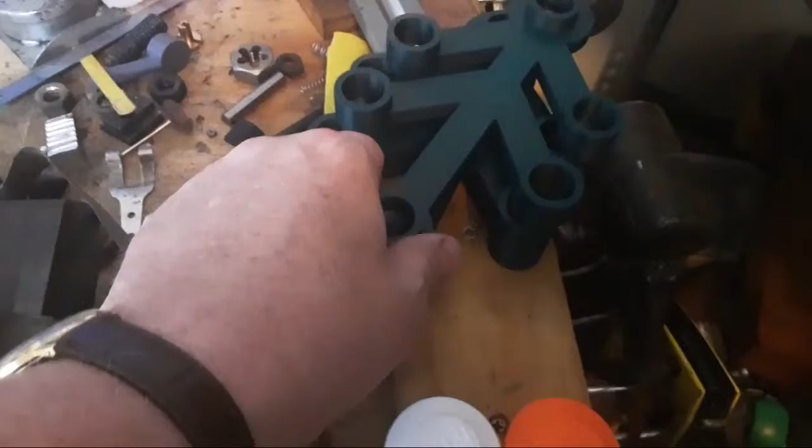And a stack of these. The giant Lego bits, just a Christmas wreath, is actually what it is. So over the weekend I printed 6 of them.

There is a new LBSC book out, David. Eddie's written it, he's done a good job of it, I believe. I haven't actually got one yet, I haven't seen one. I have every intention of ordering one in the next week, but it hasn't happened yet. Looks like a good video, a good book. I've got 2 books from the UK from friends who've written that I'd really, really like, but it hasn't happened. Neither of them have happened yet, so it will.

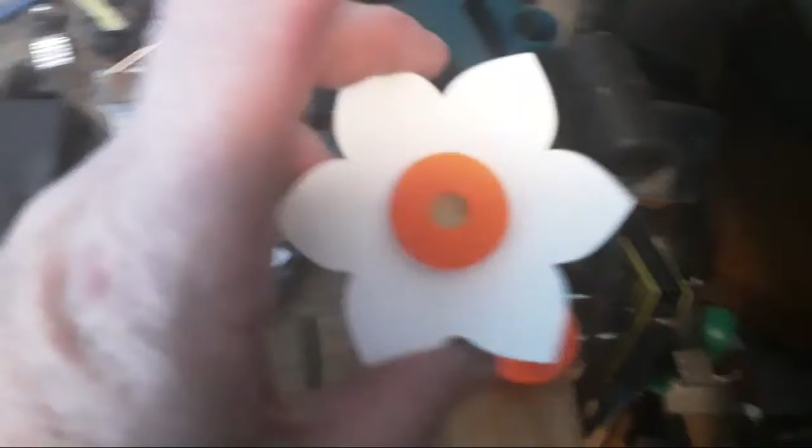So basically there's some Lego flowers, all clips together like that. Oh, good stuff David, give us an idea what it's like. Eddie's a pretty good friend, actually.

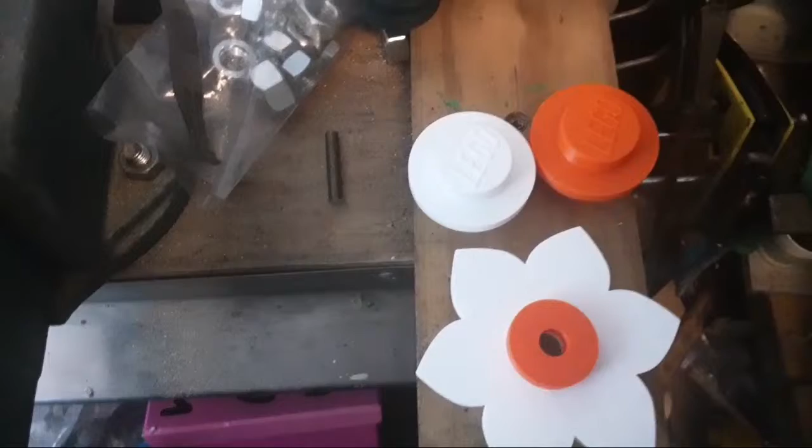I think one of my photos might actually even be in the book, but I'm not sure about that, haven't seen one yet. My picture of the blue plaque at Purley Grange, or Purley Road. I think that might be my picture, but I'm not sure. Don't know if he used it or not in the end. It was probably fairly muddy because it was sort of a second hand when he got it. When I got it, really. But anyway.

So that's a project, these took about 4 hours each. The Prusa firmware makes these pretty quick. Hey, Stuart.

These I'm printing with support. They probably hardly need it, they're well designed, they probably don't need it I think. But I'm printing them with support. So this is taking about an hour.

And 4 of these flowers, 3 of these flowers took about 4 hours. So there's a bit, someone was asking, but there's a bit of work in it. There's 6 of these, I think, and there'll be some more, I think 4 white flowers and 4 yellow flowers, something like that, with dots, and some yellow ones and white ones and orange ones. Anyway, present for someone, just messing around with that.

So the printer went most of the weekend.

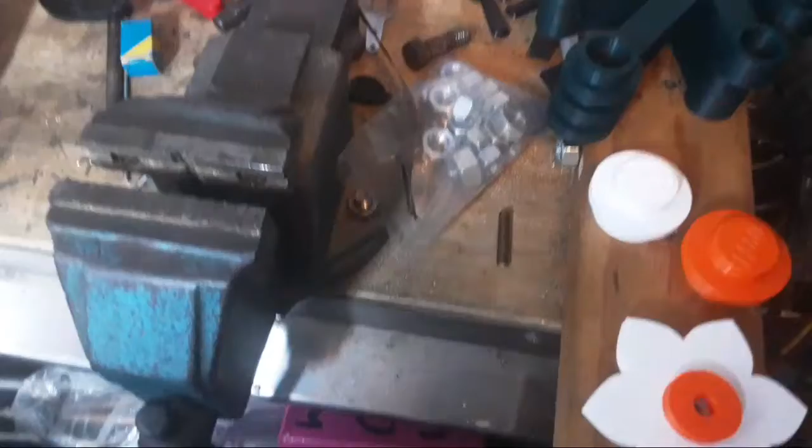Watched a little bit of YouTube, not a lot. I noticed there's a ClickSpring video out today, which means there's probably content back on Patreon. I'm not a Patreon supporter of ClickSpring because he kind of aggravates me a little bit. But I feel like I'm probably missing out, which is not good. But anyway, we'll follow along and see what happens, see if it's worth joining up again.

Rustanox, good day. There's a build video this week. It was quite a good build video, and I'm glad they've got the power back on and stuff down there. There was a Mark Shed Talk, a couple of Mark Shed Talk videos.

That's it. I stopped on the way home and bought some supplies. I was a couple of drills short in my Imperial set - still am when I look at it. I'm not sure how many of them actually got put back in the box. That's a bit of an issue, because I know I had a new drill there. Anyway, we've got some upgrades on that, and a couple of metric ones too that were missing. There's the 7/32 one that I couldn't find. Might put that away.

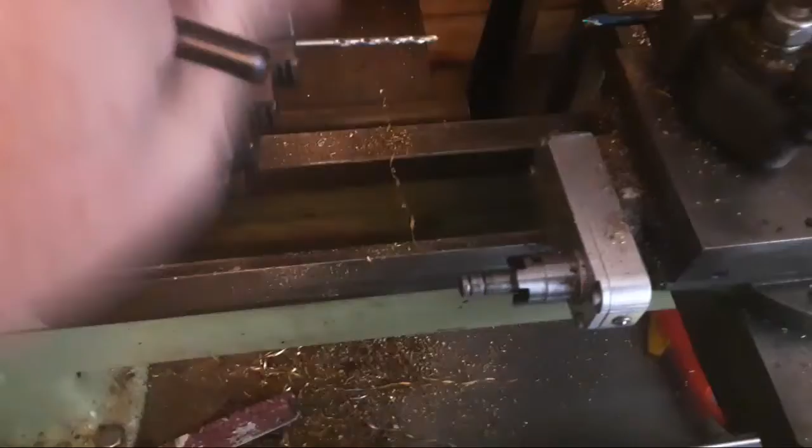So this workshop's looking a bit lived in, because for most of the weekend I built this.

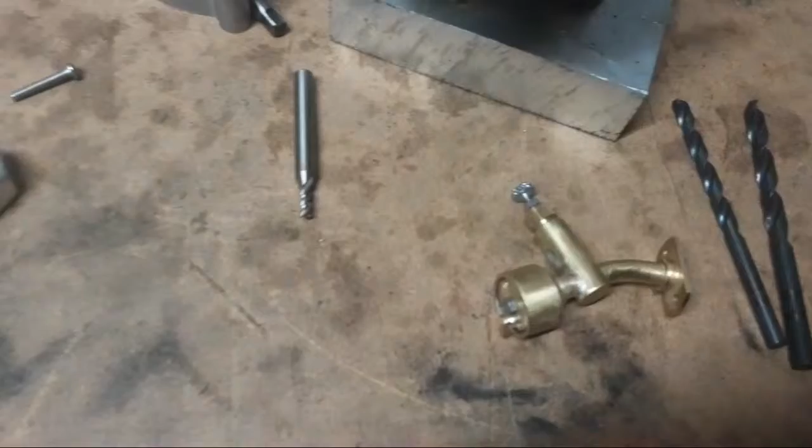Kevin, good day. How many people am I a patron for? Not many, actually, nowadays. A couple of creators that...

I don't know if this stuff's public knowledge, but there's a couple of creators that are a little bit not mainstream that I really enjoy, that have got nothing to do with anything I show on this channel.

I support Stefan. I support... not many, actually. There's not as many as there used to be.

Good vehicle for Joe. I don't even want to see. I'll forward that to him in a minute.

I can't afford to do Patreon either, really. So...

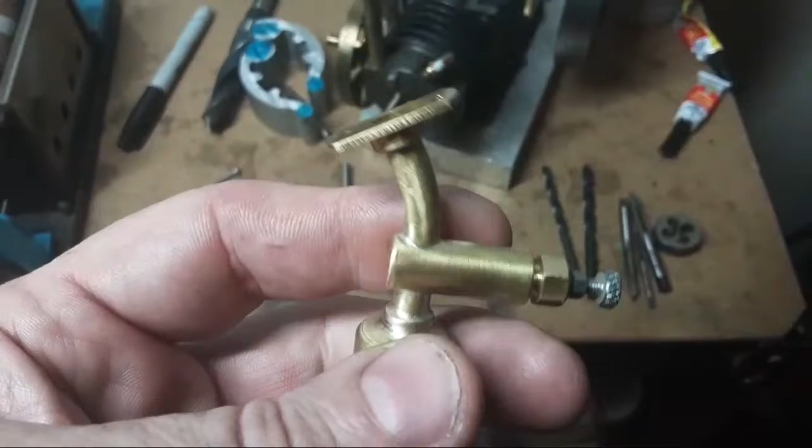Got a bit serious and made this, which is the fuel mixer for this engine.

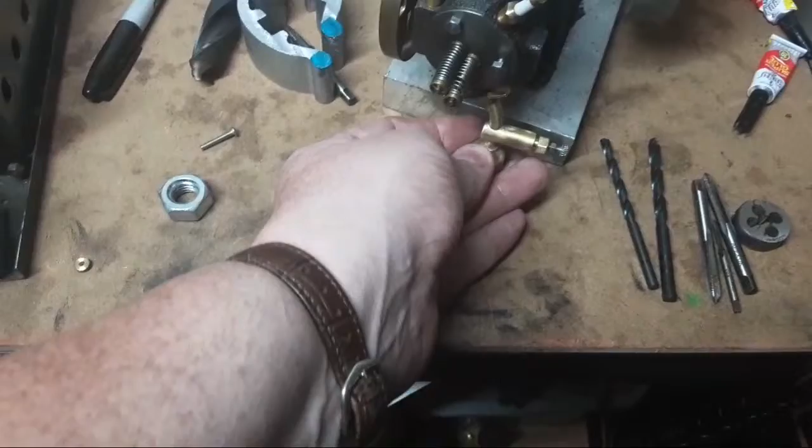That's actual real progress. It goes in under there, which feels like real progress. This has got a choke. Look at that. How cool is that?

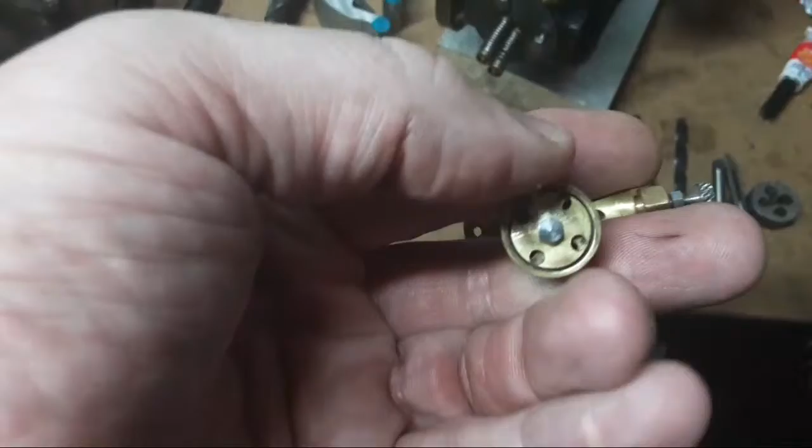Volkswagen thing. You're going to get him to get a Volkswagen thing? Don't think that's a good idea. Volvo 740 GL is probably about his speed, but anyway. It's not German either.

So this has got a mixer, choke on there. It's got a needle valve with a nut and a flange. I haven't soldered this flange on because that's got to be drilled to match. This has got to be drilled yet to match that flange. And I'm really reluctant to pull this head down any more times than I've got to. So I'm probably going to make sure I've got all the other bits to put on it before I do that.

Because it's not much fun. It needs a copper pipe in the bottom there for delivery.

Now, needle. I'm going to undo this. It's actually tighter than I thought it was.

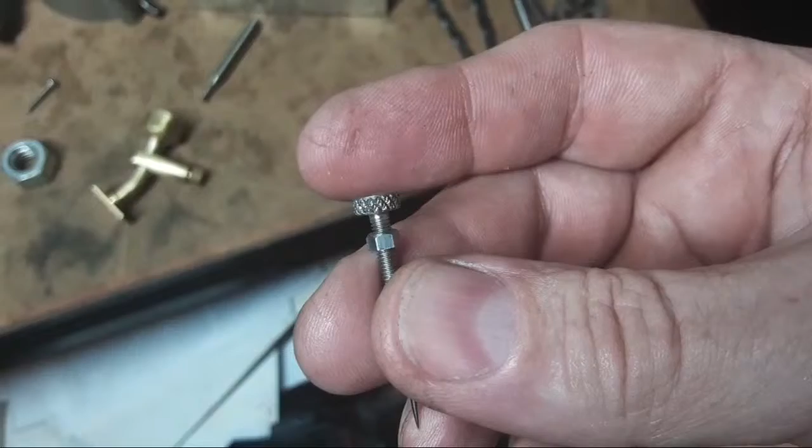Loctite it in a nice neat fit hole, and I put a thread on the end of a piece of bar and then knurled it nicely, or reasonably nicely - I don't know how good the knurl is - with a lock nut. So that's all I've done, and all that does is seat in a 1/16 hole.

If we unscrew that, probably there's a hole there that could do with a bit of a scrub or a wire brush or something to clean all the crap out of that. Might do that at some point.

It wants some sort of a brush to clean that out. Don't know. I've given this a good wire wheel up at work with Scotch-Brite brushes.

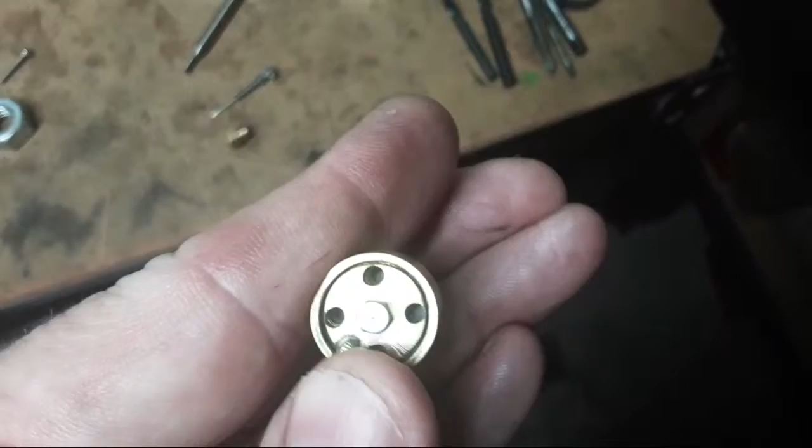When I'm looking for a needle and I ask someone, right, they're just there under the mirror. Remind me. Thank you.

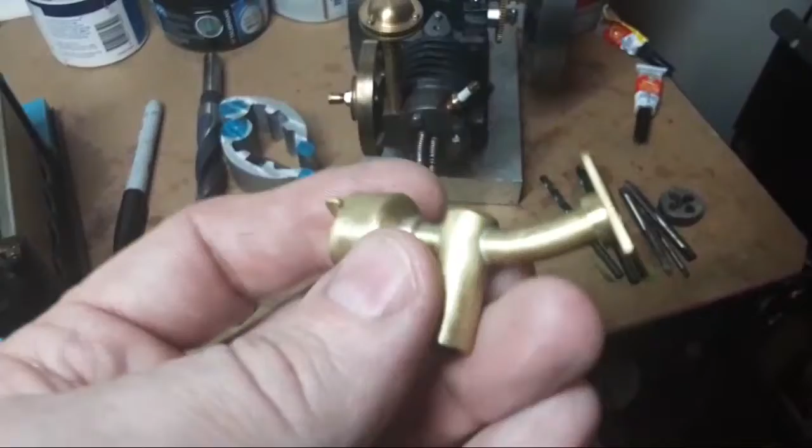So that's got a number 60 hole right through that. This is done sort of right to the drawing, so hopefully it works.

I do believe that this is a pretty nice running engine. So, hey Randy. Hopefully down to the drawings this will work.

So this is just basically a nut. It's 1/4-32 on the outside and 6BA, I think, on the inside.

Kevin, how's your engine going? What's the project? What's the latest on that?

Hopefully it's the first IC engine I ever built that runs. I built another one that ran momentarily before it wore out, but that was many years ago. I'd very much like this to be the engine that I build that runs. And this has got a pretty proven track record of actually running, so

we might be lucky. So that's that bit done. It's got a little notch there so that it doesn't, you can see that. So the choke only goes from there to there, which is really nice. Open and shut, seems to work. Might be all right. So that's some actual progress on engines, which is pretty amazing.

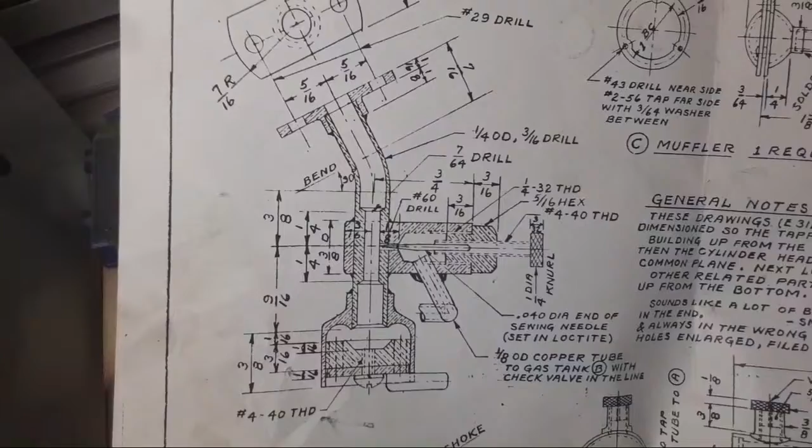One of these drawings here, which one is it? Not that one, that's the governor. There we go. So that's the drawing, which is a little bit less than to be desired, to be honest, but shows how it all works inside.

That's awesome, Gavin.

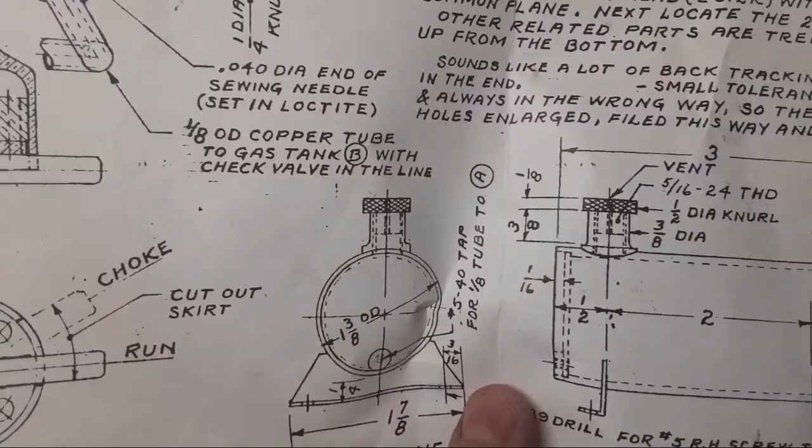It's got a little fuel tank there, which is pretty basic. And it doesn't show a non-return valve between this outlet and the inlet on the carby, but it says check valve in the line. That's all the information we have there. So probably an inline check valve of some sort. If I can find one off the shelf, it'd be really nice.

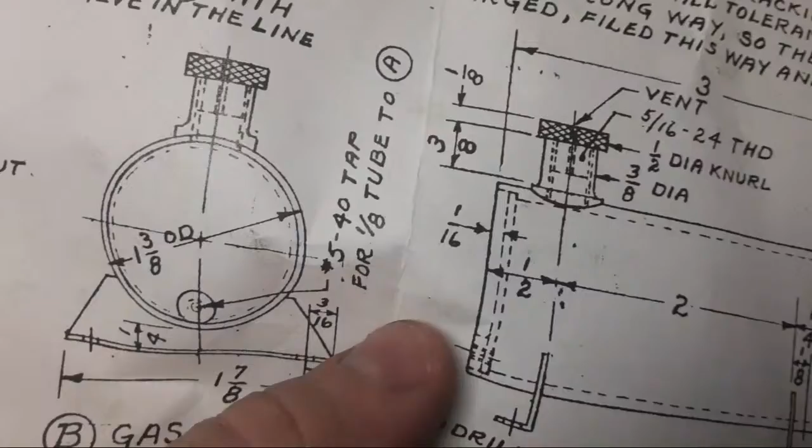Something that actually works laying down. I don't know. Might have to actually solder one on the tank, or put a pickup in the end of the tank. I don't know yet. It wants to really work out of the bottom of this. If you're going to put this tank on the same level as the engine, I think it needs to suck uphill. So maybe we put a little check valve on here. Don't know. Anyway, working on that.

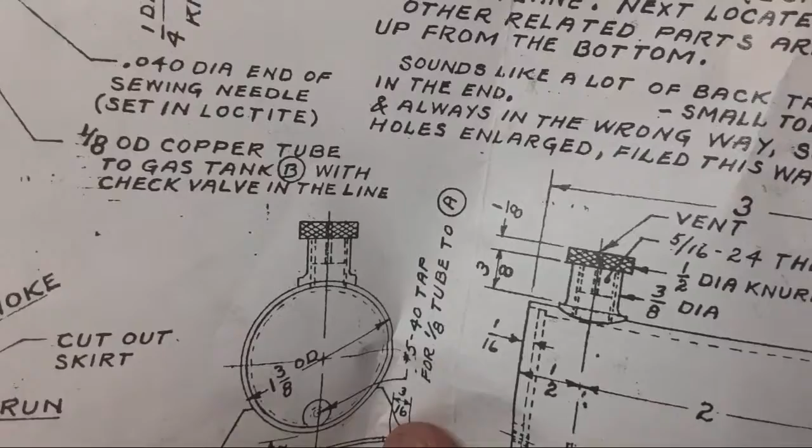This part's done. The muffler's done. It's on there. And we've still got to make a fuel tank of some sort to get a bit of 1 3/8 or 1.5 or 1.25 or something. 1 3/8 is 35mm, it's an odd sort of a size. I might have a bit of 1.5, more likely to have a piece of 1 3/4 that's 3 inches long. Make a tank out of it with a little filler and a check valve on it and a couple of brackets. So that's still got to be done.

That's all done. On this drawing is the wiring diagram too. That's about all the building instructions that come with the drawings. That's it. So that's done.

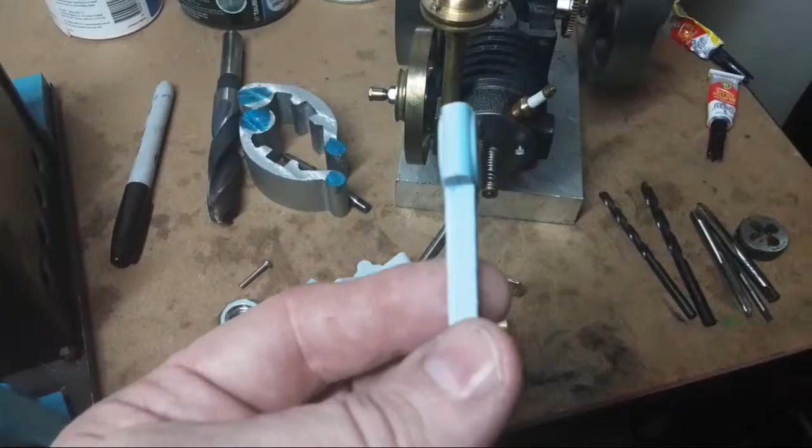These bits are sort of ready to cast, almost there. As far as progress on this, it's a conrod. Could do with a bit more of a sand up and another coat of high build filler, I think. High build primer.

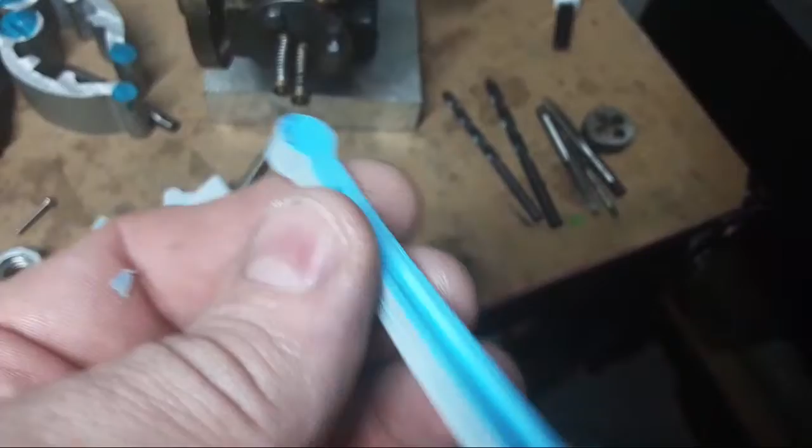But this has got a bit of paper stuck to it off the cardboard box. This new high build primer is not as good as the old one. But there's the conrod. There's enough in the machining allowance to split it. Right.

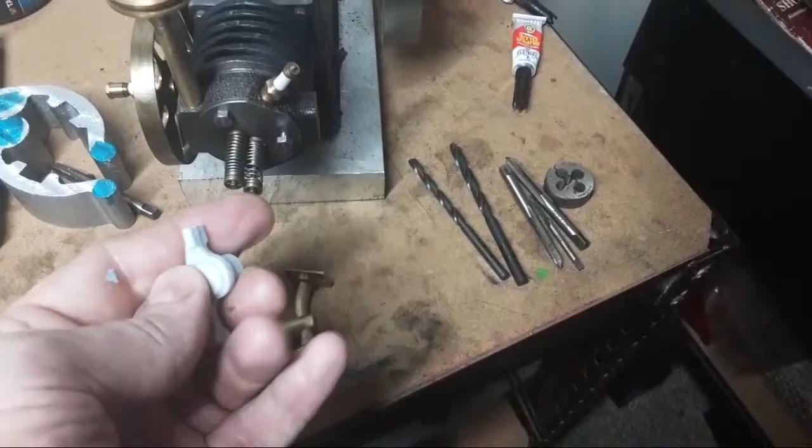And there's the rocker, which I think goes here somewhere. Don't know whether it goes that way or that way. Anyway, probably goes, I think it goes that way. Not sure.

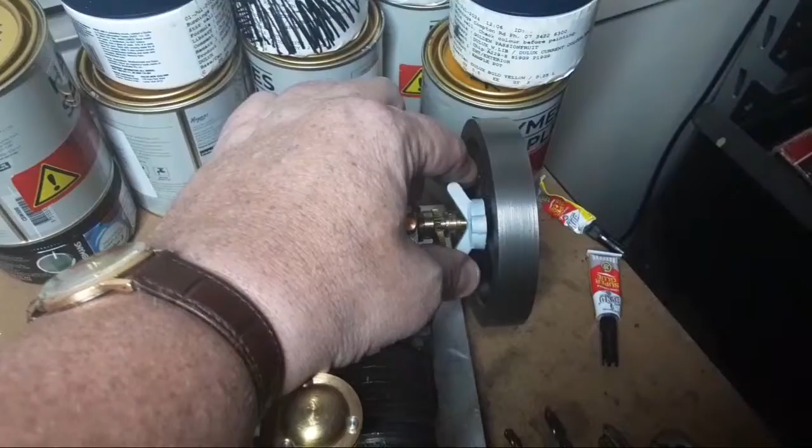And this bit here needs to be done as well. This is the yoke that goes on the inside of the flywheel here for the governor. I've done this in one piece so it casts nicely, and then it's got a groove cut in here so that there's 2 separate, or 4 separate fingers. And you can machine this down and bore it so that it just fits on the side of the flywheel with 2 bolts. So that's progress on that little engine.

That's actual progress. So pretty excited about that. Something we did. Actually made some progress on a model engine.

I do remember those orange flashing lights. Haven't seen one for years. I've got some red lights here, but they don't flash. And orange ones, like council lights, but they predate the electric ones. With the timers and everything in them, they were a bit flash, some of them.

So, next job with this, get these cast. Might be this next coming weekend. I don't know, we'll see how I go, see what happens. But it'd be very nice to get it done. It's going to be a big weekend if I do that, and I'm not sure I'm up for it. And 2 weekends without actually making any revenue at all is a bit of a push at the moment. So we'll see what happens next weekend.

But be nice to get these cast, and some bits for Mark, and some bits for Dan Elston down in Melbourne. Fowler roller bits at some point. And then there's a little bracket that goes on here, which goes under those 2 bolts, like so.

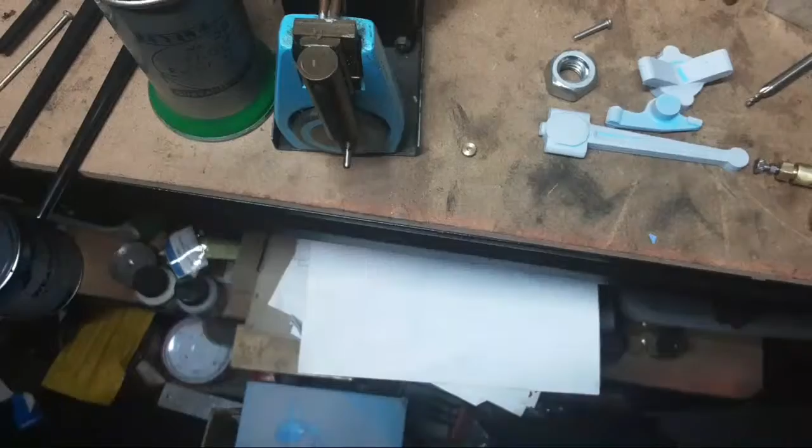Something like that, don't know how to make this. I don't think it'll cast particularly well. I'm probably going to cut a bit of brass there. I've been thinking about this, probably going to machine that out of that bit of brass. It should be about the right size.

I'll bore a ring, part it off, cut it and drill it. Probably before I do any of that, just make the ring size and then machine this on the dividing head in the right spot so it's got a groove in it. Then just find a bit of 3mm, 1/8 brass and sit it in the groove and solder it. It's probably the best way to make that out of brass.

So that's the rocker. Next job, this needs to be done, which is the outside. I've been saying for weeks that needs to be done. I did go as far as to set one of these up in the four jaw and discover you couldn't drill them that way. It's just going to have to be done out in the mill. Not a big job, just got to come and find time to do it.

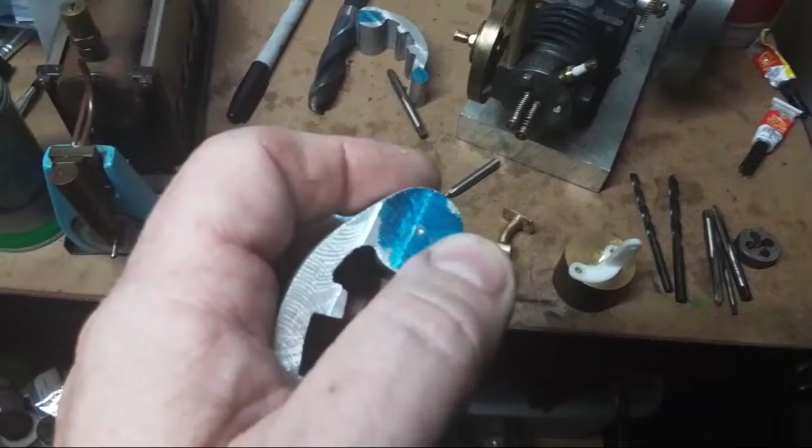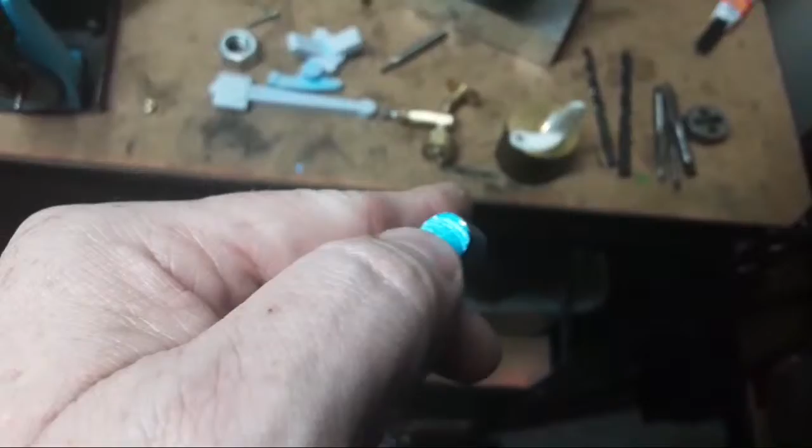And then one of them's machined to 5/8 wide, or 16mm wide in the middle, with the ends missing, and another one's the opposite so that it sits over the top of it and there's a pin goes in there. And then there's another pin in each end of these with a cross hole and a thread, and a nut and a spring to adjust the distance apart. If that makes any sense.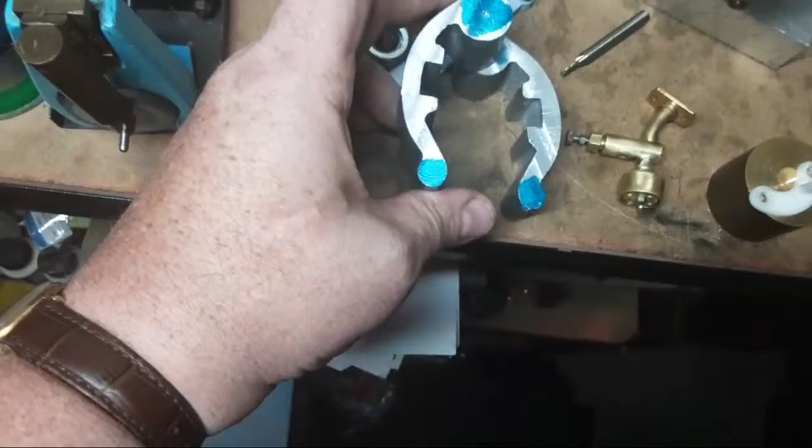Then there's a couple of brass blocks with stones cemented in them, which screw in there, that are interchangeable. So it's quite a good little tool, and I think it'll come up nice, but I've got to find time to do it. So that's another job, and then there's the internal lap, and then we can start messing around.

If anyone's even interested in model engines nowadays - start messing around and machine this and hone it to fit that cylinder, and machine it to length and cross drill it for the wrist pin for the con rod.

Like so. And that's all the tricky bits. Once we've got compression, I've got

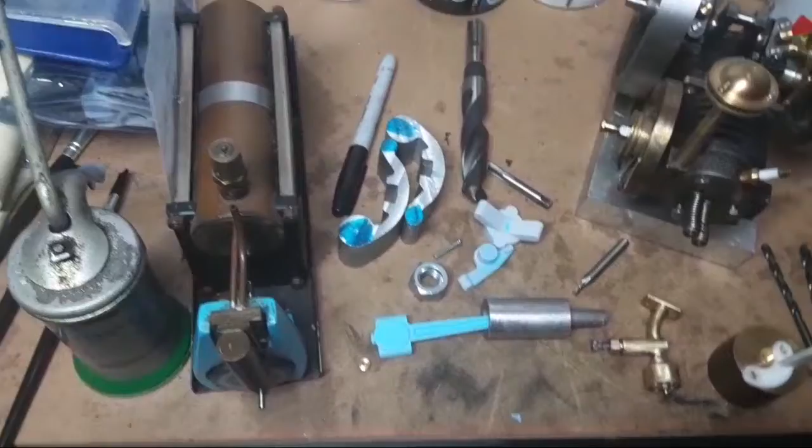a reasonable amount of faith, maybe, in my bearings and my crankshaft, and oilers and gears and things. I think I've got most of that pretty good. I know that this is concentric to this, and that's a problem that I had with the Stuart 400,

was that this crank ended up not quite exactly in line with this bore because of hardness in the casting, and that was a bit disappointing. And at some point,

I'd like to probably machine the whole bearing off and drill it and put a decent press-in piece, or shrink-in piece, in steel that's actually the right job for it - actually parallel and all that sort of stuff. And I think that would get us a long way towards getting that running. I think that's the main problem with that.

Anyway, one of the major problems with it is that there was a hard spot in the casting, and this bore has gone off center. Anyway,

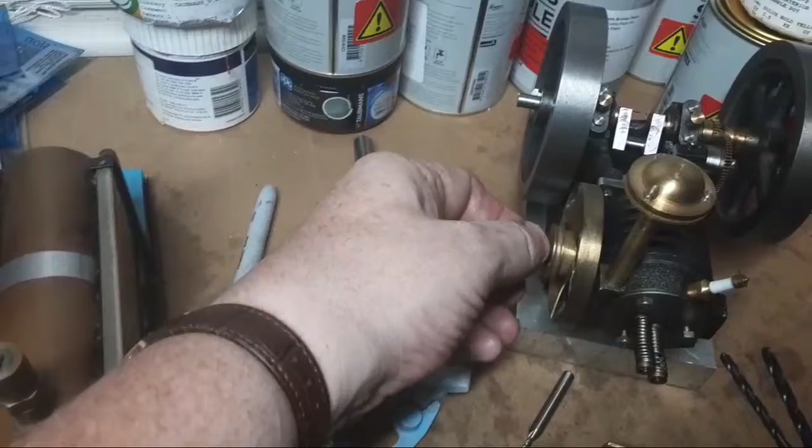We've got a fan, if it actually blows with air. In fact, I'm not feeling like it probably blows very much air. But it's got an oiler on the end of it, and bolt, pin, that's done. Muffler's all together, it's pretty good.

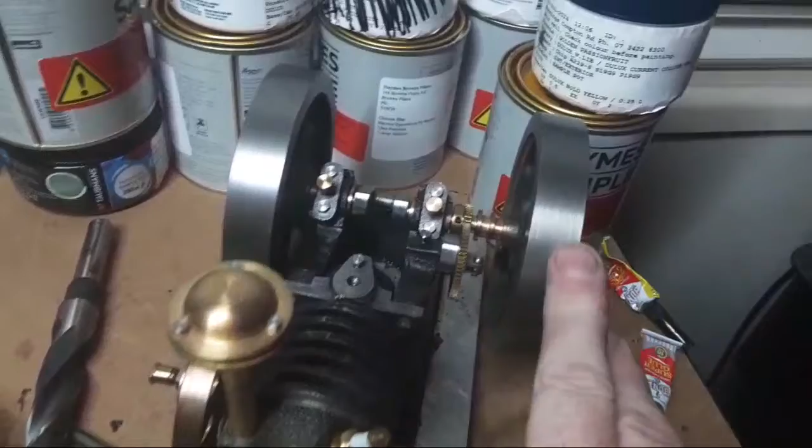Actually screws in nice and square and straight, which is good. It's vertical. Got this little pin made for the rocker, and I've got the cam all done. Timing gears are in. This governor yoke moves nicely.

It's a matter of making this bit, bolting it on, making the two rocker arms that go through the two arms that go through here for the weights, come out on the outside with springs on them, and a trip pin in here to hold the valve open, and then it's just a rocker arm. So there's not a whole lot.

Is this from a kit? Yeah, sort of. Bit of a story.

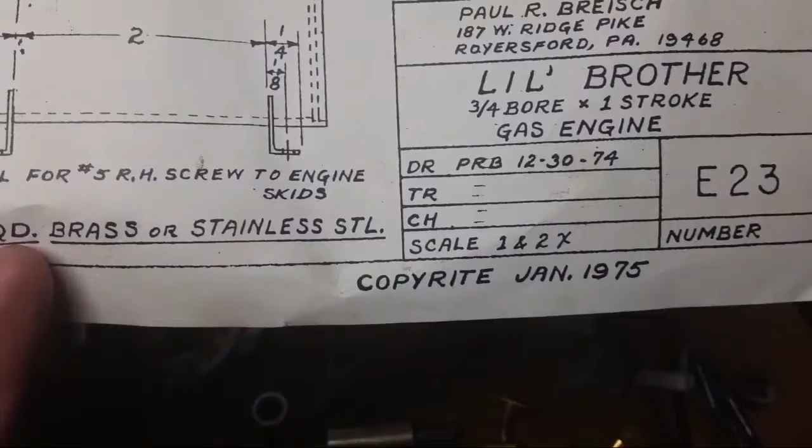This set of castings is probably nearly as old as me. If we look at this drawing, they were drawn January '75, which is older than me actually. It's 50 years, and I'm almost 50. Not much older than me.

So Paul Breisch in the US made this set of castings, and quite a big range of castings actually they did. They did a very pretty little olds about this big, and then they built a bigger one of these and a stovepipe domestic, and some really pretty engines actually.

When I was growing up, these engines were the ones that were on the back cover traditionally of the gas engine magazine. They had a model maker's corner, and quite often there was a page of pretty little model engines that people had made back in the day before the internet, and they were all a bit sweet. This was a common one, and I always thought, well, I'd like to build a Breisch engine.

A couple of engines I'd really like to make, and this is one of them. The other one I'd really like to make is the Alyn Foundry RLE, and I've got that kit as well. I've got an original one of them in the cupboard here too, and I'm not sure who's going to last the longest, but either Graham Corry from Alyn Foundry or Myford Boy, one of them's going to shuffle off at some point, sorry, but I'd like to get both engines finished before they do. I've got a Myford Boy engine as well.

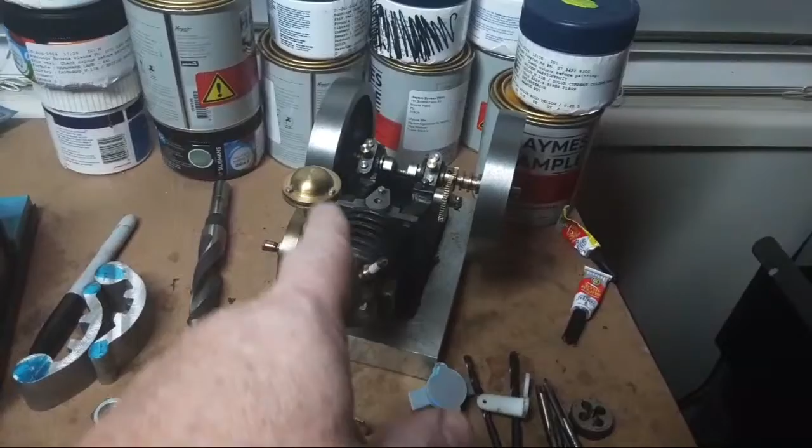It's things like just bits and pieces, like these are the main bearings that he had, which were just sort of oversized for the drawings and completely oversized for the crankshaft that was with it.

Just an assortment of bits like this one. I have no idea what this was going to be. I think it was going to be the cam. Yep, cam written on there. Made a decent cam, which is actually a CNC component. It's the only real CNC component in this. Joe did that for me, which is very nice. And he also cut this fan blade, which saved a lot of work.

It was bored. Nothing else was. So I've had to work around the bore and a few other little jobs, but not much else was done.

I got into it last year, I think it was, and had a bit of a go at it, and got it to this stage.

I've got new valves and springs. I think the springs are pretty good - I don't know, this little intake spring might be a bit heavy still. The exhaust spring I think is very good. I've pressure tested the head. I've made the spark plug.

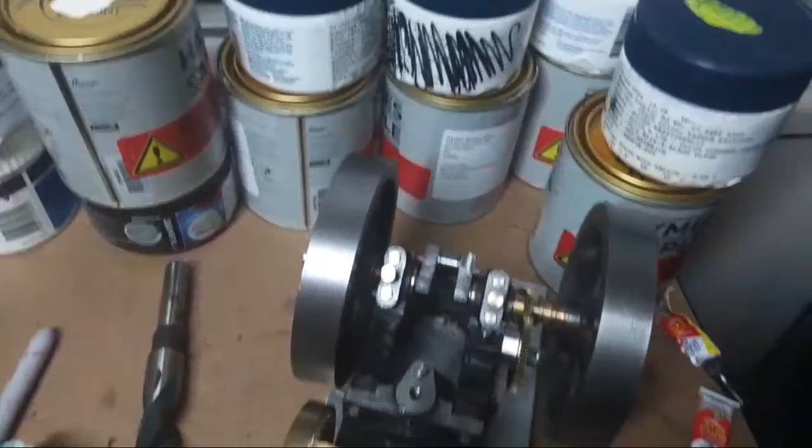It should sort of all work. I'm reasonably confident with this because I know that there's a lot of them that do work. I've seen a lot of write-ups on building them, and I've not actually seen too much that says that they won't work. So if you build it to the book, it should work.

And this is the mixer that goes on it. A few levers and bits and pieces. They're just basic little bits.

This has to be made. There's another one there - that's the little rocker arm that goes in there and works in there like that. That's got to be steel or brass or something. I think they probably made it out of brass. I might get one of them cast too, I don't know yet.

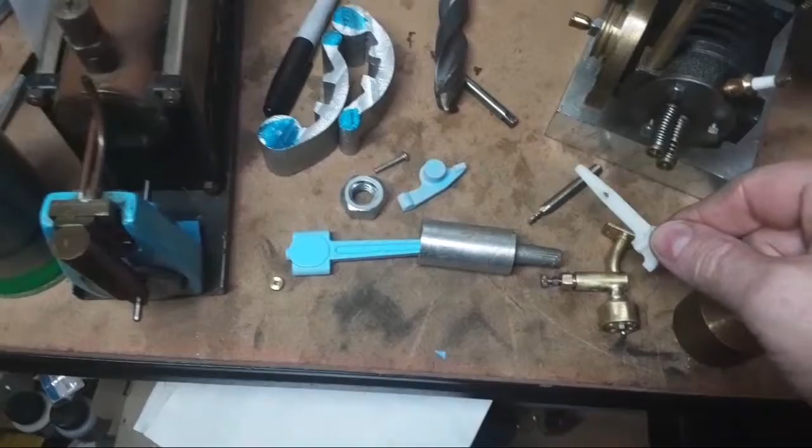It's probably not a big deal to make one up out of steel.

Yeah, I'd like to get this running. There's still the spark arrangement to go on the side, which has got tungsten points on it.

Let's have a look at the rest of the drawings, if anyone's interested and hasn't already seen them.

They're pretty basic really by today's standards for model drawings, and they're kind of nice. But here we go. So crankshaft, we've done that. Valves, done them. There's the rocker arm. Push rod assembly, not complicated, got most of the steel for that.

Cam details and the timing gear. The other timing gear, cam gear shaft, it's all done. The governor weights are still got to be done.

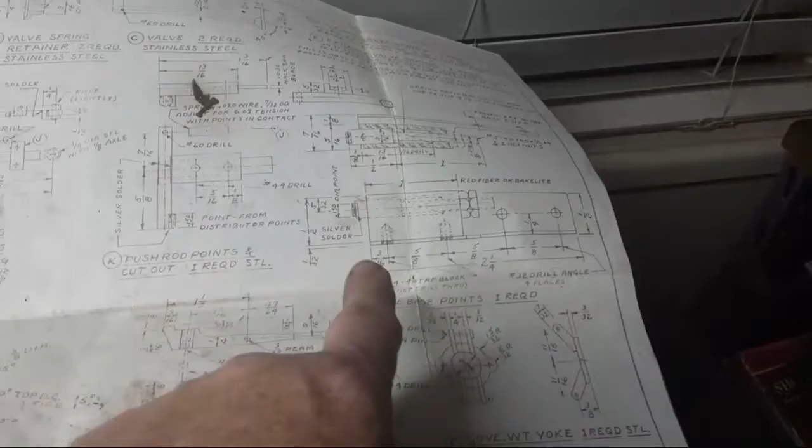The governor yoke's done, and that's that piece there that we're working on at the moment. It's got this arrangement here, which is a spring-loaded tungsten contact and another one on the push rod, which is probably a good, reliable system. So, matter of making that up. It doesn't look too obtrusive, really, which is all model engine ignition systems are a little bit of a compromise as far as being to scale. But this probably looks all right.

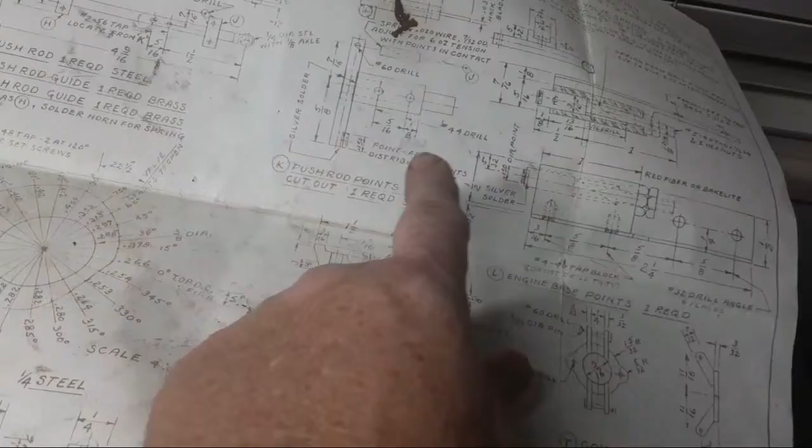It's this piece here with the rod down here and the contact points on here and the spring. And then this one's spring loaded so that it releases a bit with it and then all of a sudden it snaps apart. So that gives you your dwell as the weight of this spring, I think. And then it's adjustable at the back. And there's 2 bolts that screw on the side of the block. So that's how that works.

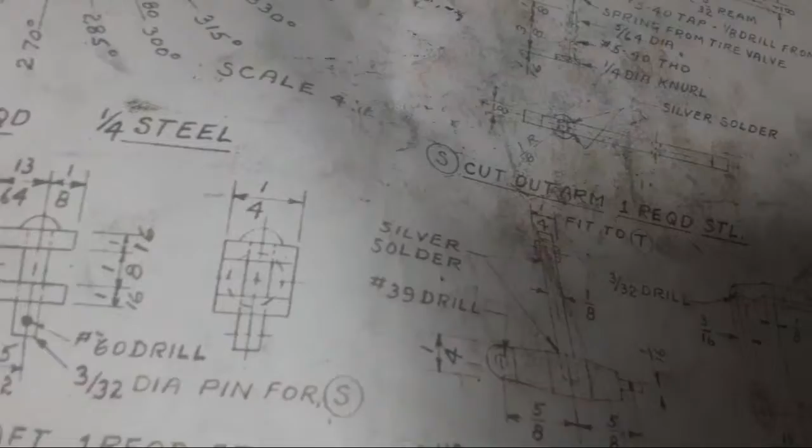There's a lot of small stuff. There's a fact sheet on making a one-piece crank. We've done that. It's probably very useful information, actually. Soft soldered brass bar in to prevent springing. Saw, drill out the areas in the middle, and turn the drawings and cut out the spacer bar. So that was a good way to make it, and it worked quite well, and I've got a nice little crank.

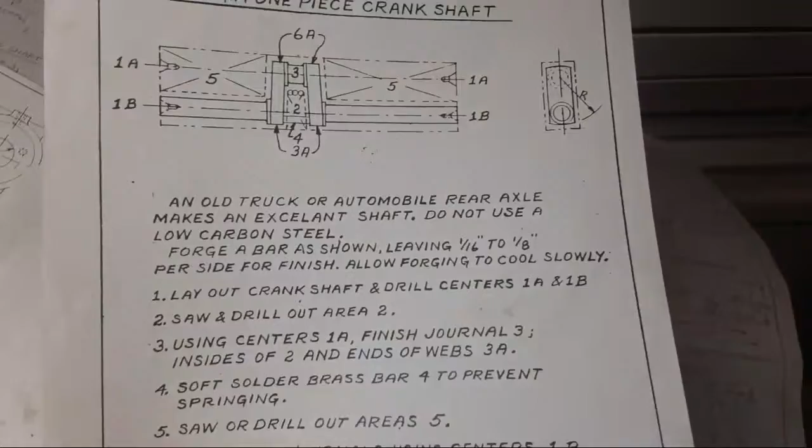There's a spark plug drawing. How to make one of them. That turned out pretty good too, I think. Hopefully I'll make another one if it leaks or if there's problems with it. There was a suggestion on one of the forums that it could be a fraction longer, which is probably a valid point. We'll see how that goes.

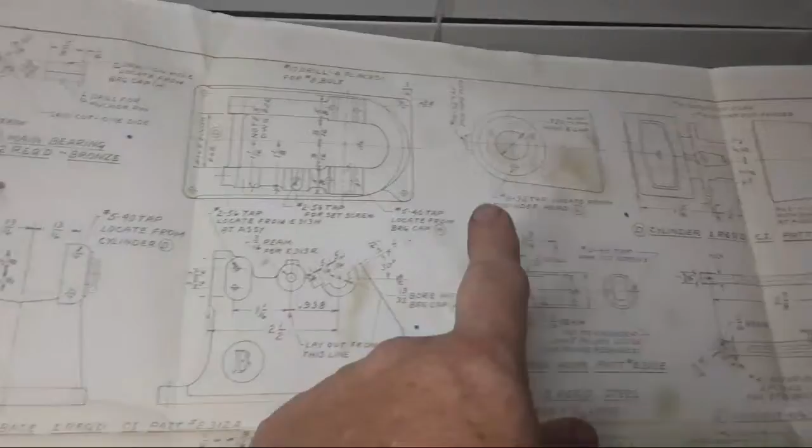The other drawing, and these have seen a lot of workshop use, and not just in my workshop probably. So there's the base, and the water-cooled version is really pretty, but I haven't got that casting. There's the conrod piston. Cylinder head with the press-in valve guide,

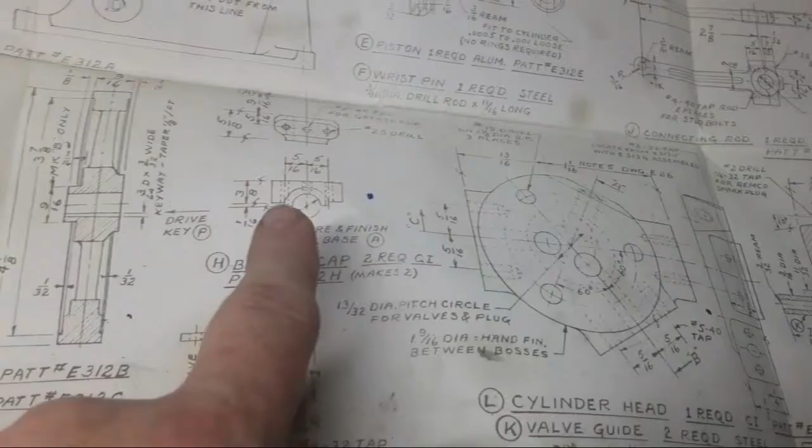and I'm pretty happy with how that's turned out. I spent a lot of time on this, get it to seal and stuff. There's the bearing caps and that rocker arm bracket and a couple of flywheels, how they work, and a couple of keys.

Most of these bits are made. Still got this one and this one, which is the conrod and the piston, and this one here. That's all that really needs to be done. Oh, and this little pin here, I haven't got one of them, which goes in this bracket which holds the rocker on. So there's not much more to do, to be honest.

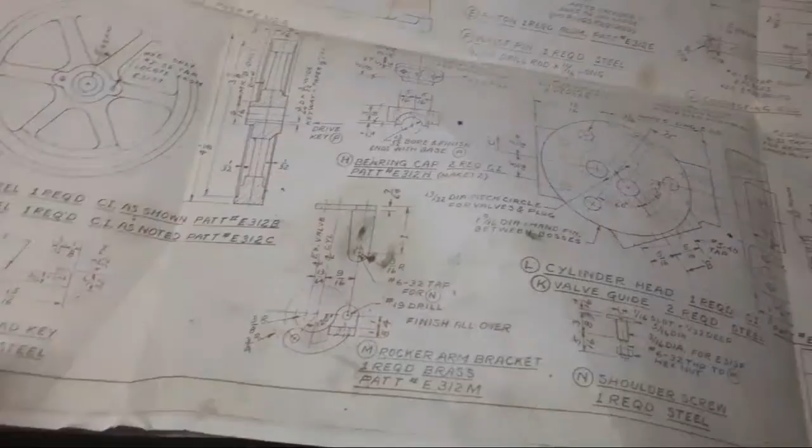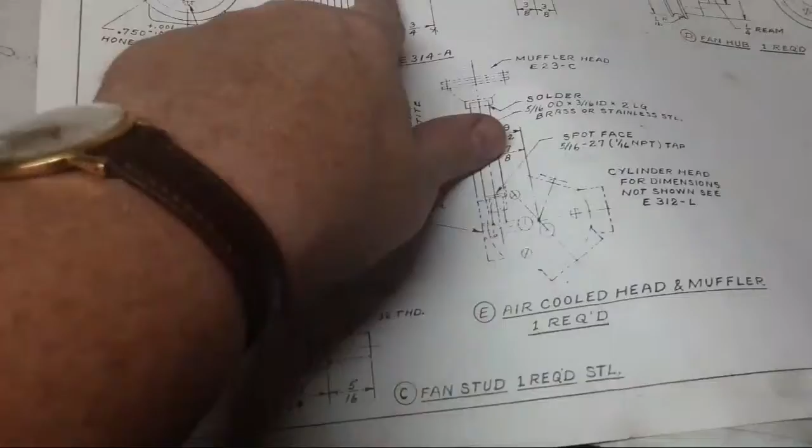Pretty keen to get it going. The labour intensive bits for it are the cylinder lap. This is 3/4 bore. This says 750 plus or minus, plus 1 thou minus nothing. So it's probably a fairly critical dimension, but talking to a few people who know stuff, they say that whatever you've got, just make the piston to fit it.

Well, do I think it'll be completed this year? I'd like to have a go at it, actually. I'd like to get in and make some progress on it now. There's other things out of the way.

At this point, priority is any painting work that comes in on my weekends, to be honest.

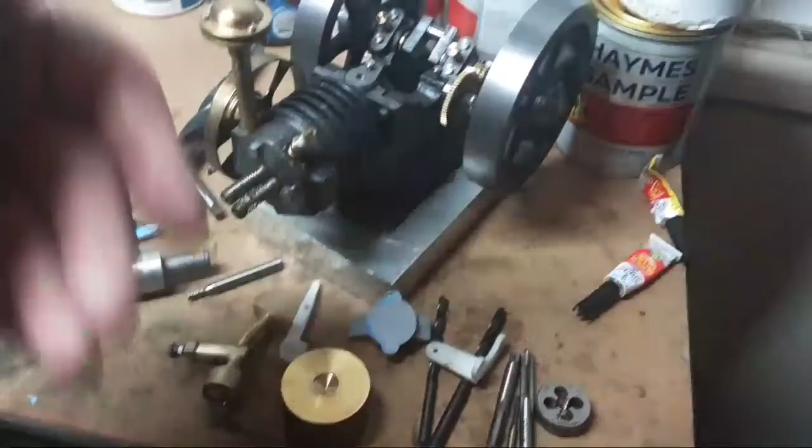mount the base on a fixture plate like that, because it's so much easier to set this thing up and machine bits for it. If you want to put 4 holes in here, which I will at some point, that's another job that needs doing when the valves are out of it. So rather than strip them down a few times, I'll get all this ready to go on. I've already

bolted all this up and machined this face and this face. Got some actual light, sorry guys. This face and this face is flush. And then

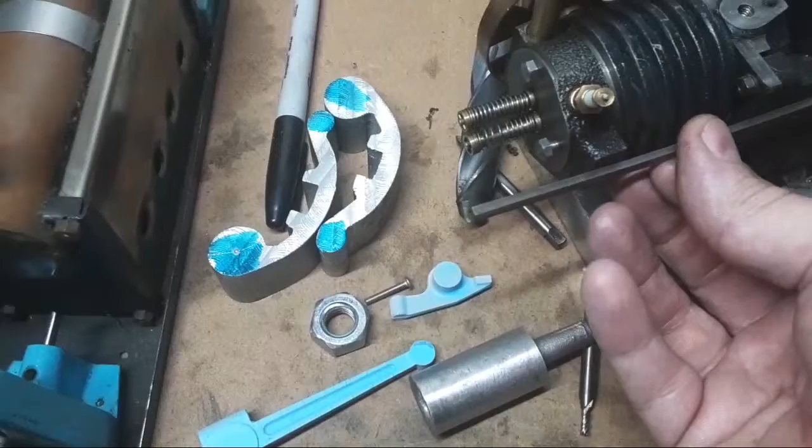we've got a push rod runs on there with a little keeper on each side. Probably. Runs off the camshaft, still thinking about that. So it needs 2 holes here and 2 holes here for the keepers. So that needs to be done on the cylinder.

We need to put all that together and do that. And then the easiest way is to put this on and set this at 30 degrees and just machine this. I do have the block for this that this screws on for pressure testing it and machining the rest. So I may bolt it on that to put in the dividing head and set this up.

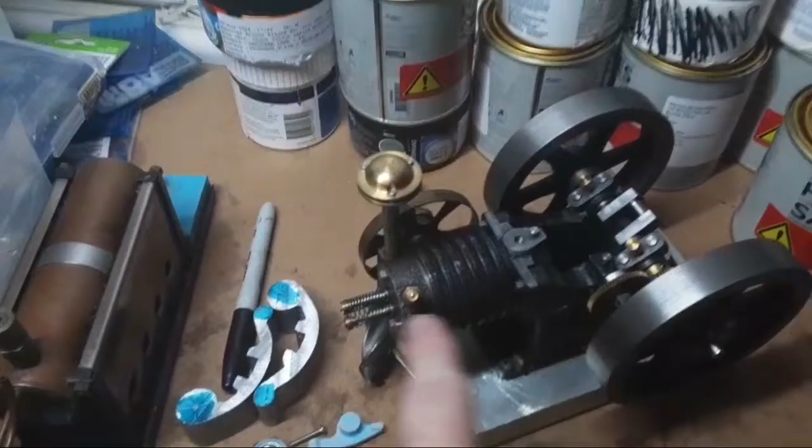Don't know yet, one way or the other, but for both those jobs, these valves all got to come out. So I only want to do that one more time, if that, because it's a messing around job to get them to seal again once they go back in. So

I think I'm probably going to put a spacer under here so that this actually lines up with the cam. So a little flat spacer here and a little flat spacer there, and then the piece goes over the top with 2 bolts, like 8BA or 10BA or something tiny. And then this will bolt on those 2 bolt holes. And the rocker goes on here, something like that, yeah, like that.

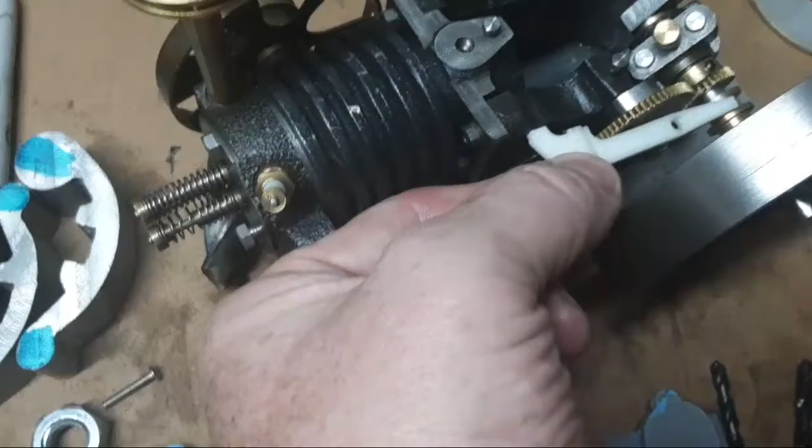So that's your valve timing basically finished. There's a little block here that this lever detaches behind. That goes in there like that. It catches behind there when the governors flick the weights out. And that's what holds the exhaust valve open so it doesn't fire till it slows back down. Makes it hit and miss. I'm sure we all know how those work.

But there you go, I've waffled on about that. I got all excited about that again. There's some pretty miserable bits that still need to be made. But anyway, we'll get there.

Flywheel's not a terrible fit, I don't think they'll come loose. Everything looks pretty good.

Still got to make a brass oiler. I bought some oil glass. I've also got a little piece of plastic here, which is probably what I'm going to use for the oiler. Something like that on here. Make a little brass oiler. This is only a small prototype engine anyway, so a bigger oiler won't look terrible on it.

But still got to sit down and make that at some point. But that's just polycarbonate. That's probably another weekend's work to make the oiler. And if we got all these cast, that's another weekend. And then

in the new space, what machinery do I have access to? I've got a lathe, I've got a mill. The CVA's out the back all set up. It's pretty good. I have sold the Centec this last week or so, so I needed some cash for another project, and that comes for small business expenses and things as well. That come through all right. So some of that money eventually will go back into a DRO for the Centec at some point.

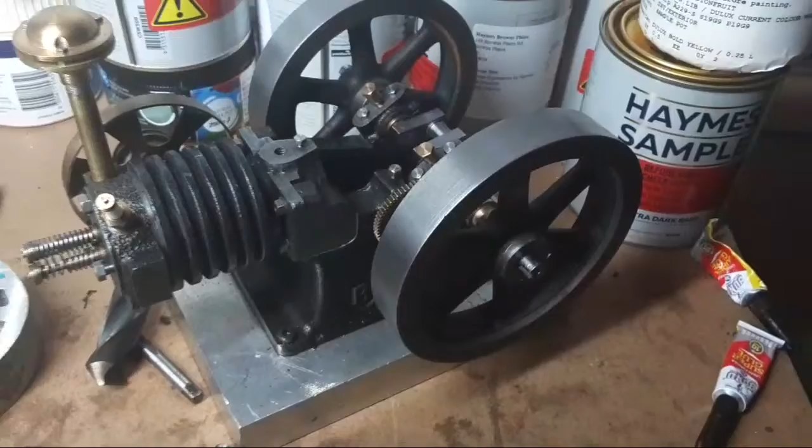Some point I'll give you a tour, yeah.

Castings are now available for it again, so all the bits that are missing. But it's a fiddly little engine, like all pump engines of miniature size - even full size ones are fiddly. Like even a big duplex pump, it's fiddly if you've got to pull it apart and put it back together, and cantankerous, to be honest. So I'm not really looking forward to it, but I'd like at some point to get that going. It'd be a nice little engine.

It's a little wobbler there - it's a nice engine. There's a hot air engine. And there's my dynamo, which is a nice little electric motor, basically. Should get that out and give it a run at some point. It runs nicely on 6 volts.

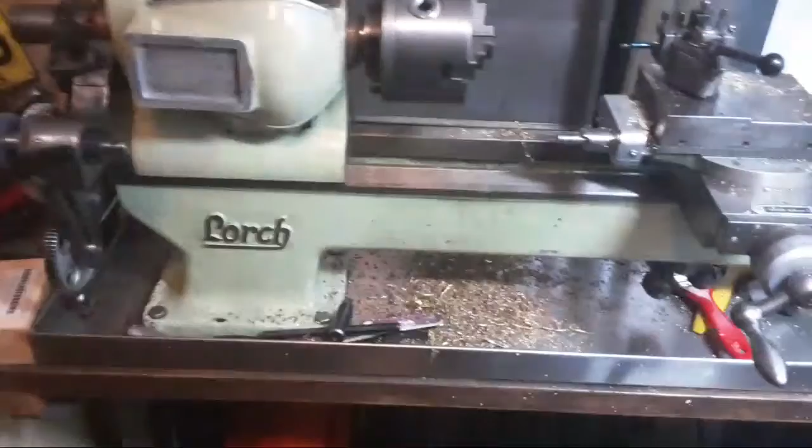One day I'd like to get the lathe finished at some point - that's another project. It's seen a bit of use. This weekend it needs a clean again. It was clean Saturday or something, but it needs another clean. Still looking a bit scruffy at the moment, but could do with a clean.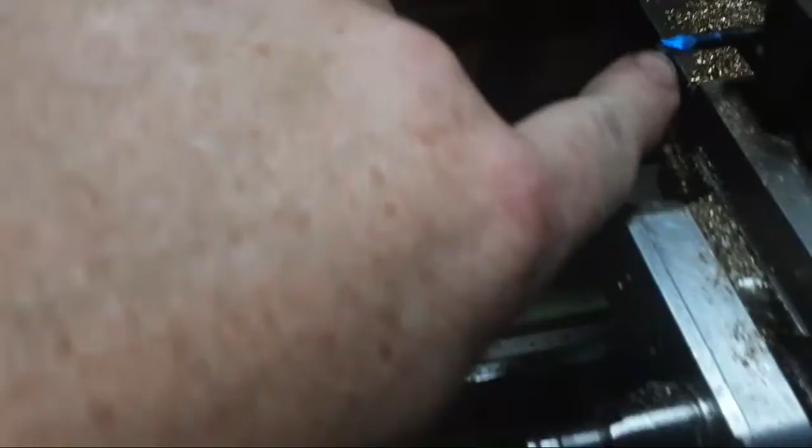If you've got model little lathes, here's a hot tip, and I noticed John Creasy's just bought a set of these - this little solid carbide boring bar. They come in sets, or different sizes, from about 2mm, 3mm, up to about 6mm, 7mm. This is quite a big one, I think it's a 5. Comes out of China, solid carbide. Very good boring bar - I don't use anything else much on this lathe now. I've got other boring bars, but this is really good.

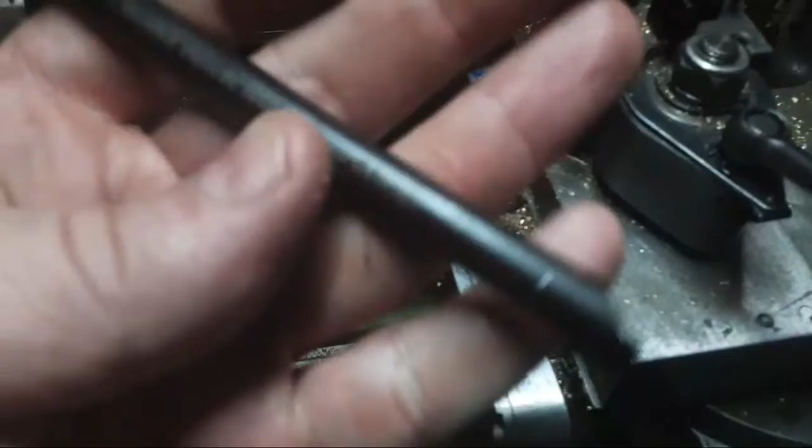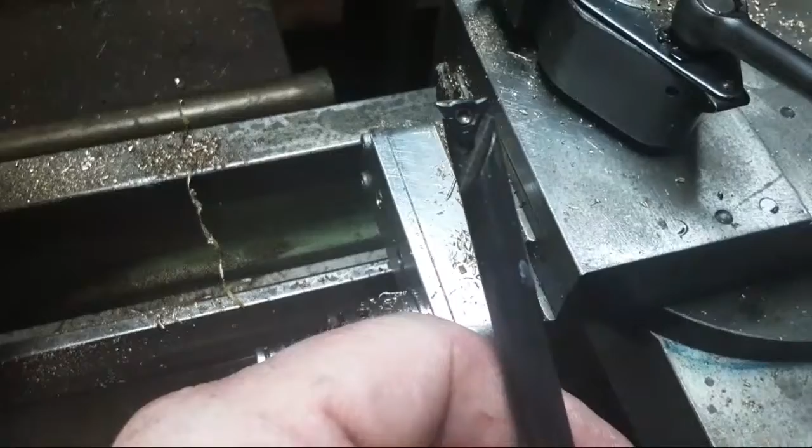The only other one I've got that gets a lot of use as a carbide bar is this one, which is a Solid Rock Machine Shop boring bar, which is fantastic. It's probably one of the best boring bars I've ever used, but getting one of these is a bit more elusive too. And finding inserts for it is a bit tricky - that's not the right insert in there at the moment.

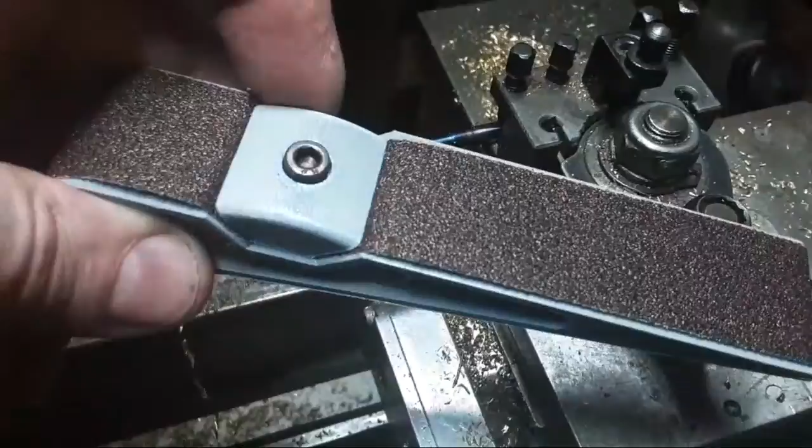So yeah, I also touched on this - I had a heap of these sanding strips, 3D printed that. If anyone wants the STL, that's a very useful thing, I think. It's had a bit of use already. I might print a few more of them when I get time. But I think that's an excellent thing.

New belt hangs up pretty well, actually. Pretty happy with the new belt - that one and that one. Very good, I think it's a winner.

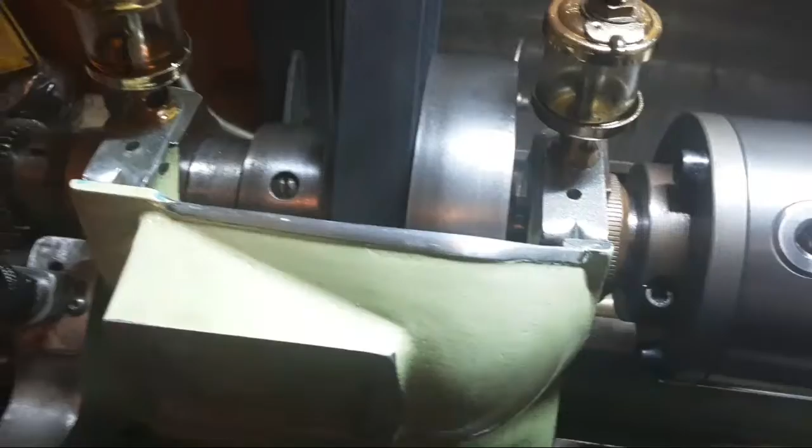As for this, there's no real progress. I'd like to make progress, but it means dedicating some time to it, and at the moment I'm feeling a bit lost. I might take it off and take it round to our mate and say, hey, what would you do as far as a guard goes? See what he thinks, because I've got no idea. Anyway, a guard feels like it's probably next, to do something with this, and then I've got to do something with this, but I probably need money to do that.

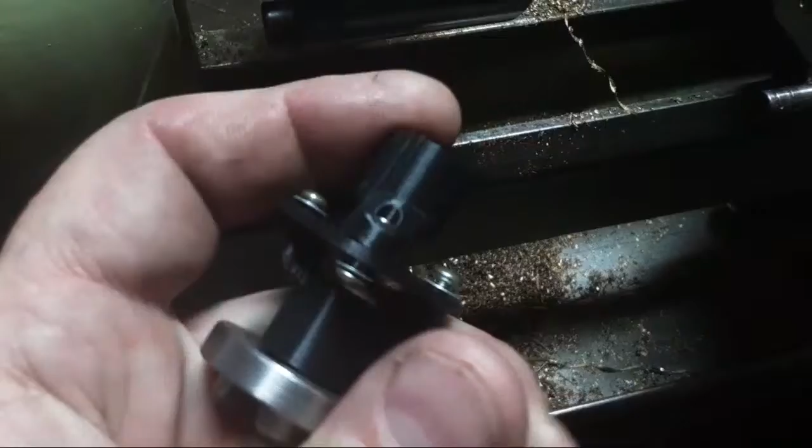I've made a couple of these little swash plates up in 3D print just to see how they'd work with probably an actual rubber drive. I think these will be better than universal joints, so I don't know how much load they're going to take.

What's going to happen is I'm going to actually find something that's half decent. They only really need that much travel on them. I'm going to find something half decent with no backlash, just buy them and fit them in. But I'm still only half-heartedly looking for them.

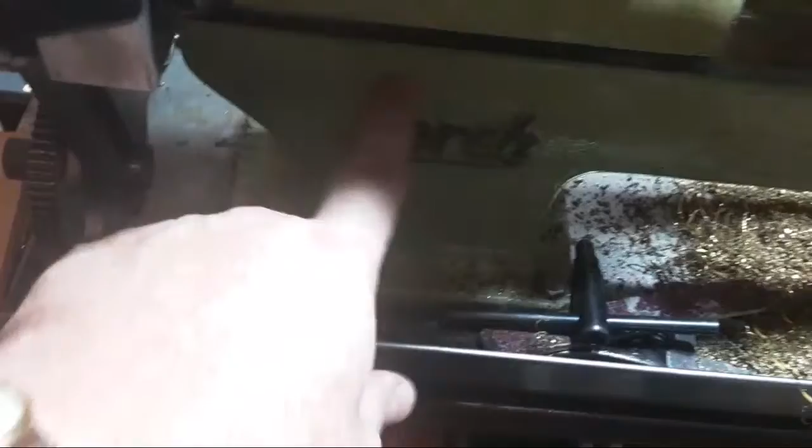Something's stripping my paint off here. I'm not happy with that. I don't know what it is, whether it's the oil I'm using. Really not sure, but my paint's coming off the base. Probably that's telling me it's time to add another coat of paint. This has got new paint on it here, and I'd like to do this and the tailstock at some point, and probably the guard on here.

Anyway, that's a job.

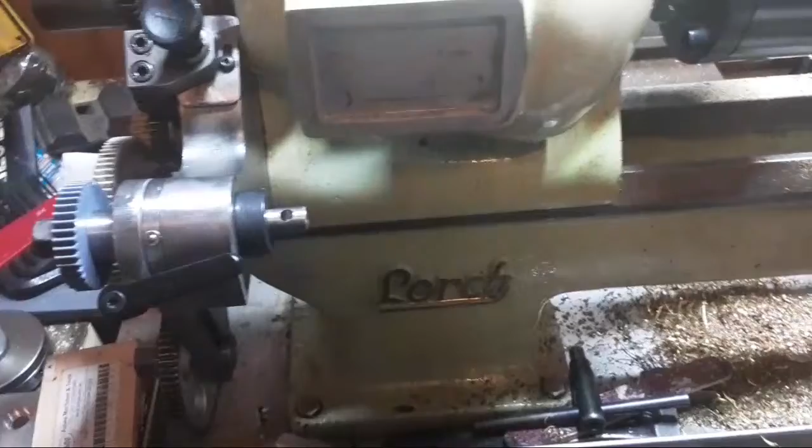There's a couple of books I'd really like to buy. Like I mentioned before, David mentioned the new LBSC model engineering book by Eddie Castellan, who lives in France, I believe, and spends his summers there and the rest of the time in the UK. Eddie's a great guy, he's written a book, put a lot of work into it, and he lives and breathes his subject. He's built a lot of curly engines, like a lot of LBSC engines, and he's had help from a lot of other people who built and who knew the man even. So it's a very good book, I think.

I'd like that. There's also a new Joby Carter book out, and there's another one coming apparently, so I really need to buy the one that's out before the new one hits. I believe the new one's going to be an ampersand book - you probably heard it here first - on punctuation and ampersand, which is a fairly interesting subject. It'd be a very interesting book from Joby. So that's a couple of books I'd like at some point, but I can't see that happening right now.

You want a copy of Foundations of Mechanical Accuracy?

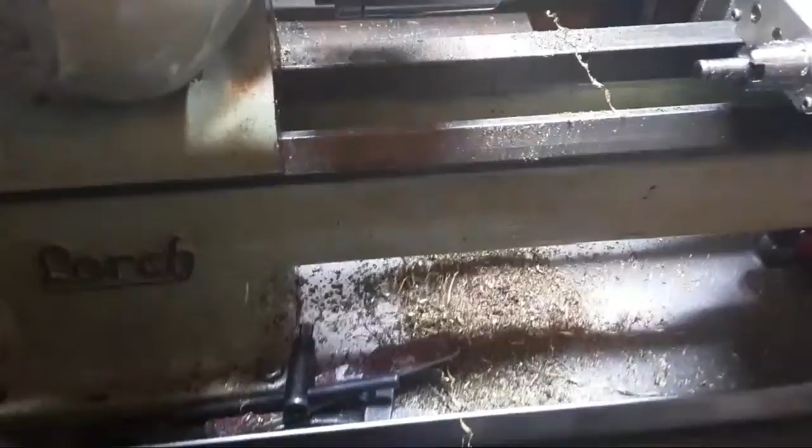I think ours is out on the coffee table. Mine's out on our coffee table. James - pity you're so far away, because it's not a lightweight book by any means, but I have one. I've got a copy of the Moore book.

That there's a book on locomotive efficiency and stuff, which is all over my head. But Mark, if he gets a copy, he might lend it to me.

It's another very good paper that's been written. I saw Mark sent through a copy or news flash update on feed water treatment and the effects of poor feed water, etc. That would be a very, very good book to get hold of. I wouldn't mind a copy of that. I think Mark had some more details. If anyone else is really interested, I'm probably going to have a go at getting a copy, but we'll see. It looked a little bit in depth as well, but feed water and its associated problems, cures and things - it's a subject I'm a bit interested in.

Apart from that, that's where we're at. If we run out of projects, there's still that guard that I want to put on there. That's something I'd like to do every time I use this lathe - I think I should have that guard on, on that hole. Hasn't happened yet.